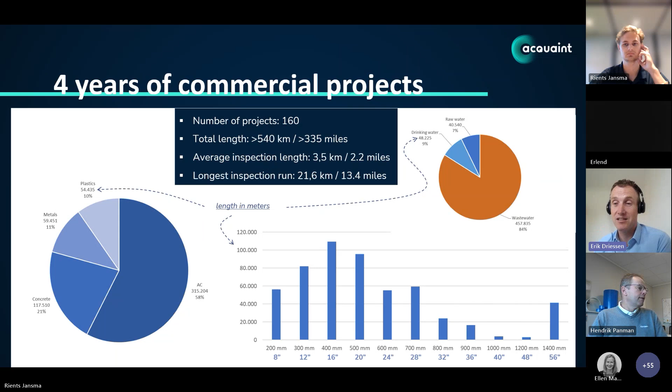And we have a sales team, and a part of the sales team is also Rients. And Rients started with our company a few months ago, really. And he will present the first results with you, and later on I will come back and present an online dashboard with you. This is the last slide for me.

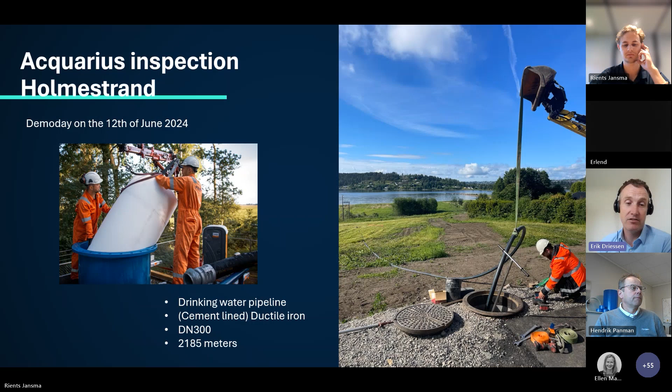So looking back at the project that Hendrik also just introduced to you, it was a ductile iron cement-lined pipeline, or at least, little spoiler, that was what we expected. DN 300 and a little bit more than 2 kilometers, and Rients will go through the results. Over to you, Rients. Yes, thank you.

Can you hear me clearly? Yes. Yep. Okay, very well.

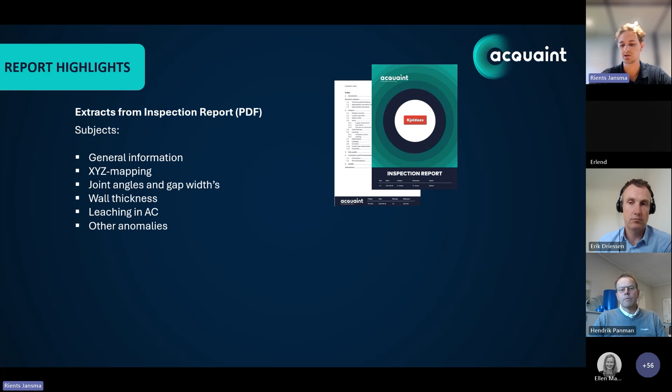So I'm going to tell you something about the highlights of the report we've sent to the Holmestrand Kommune, with subjects on general information, the XYZ mapping, joint angles and gap widths, the wall thickness, the leaching in the asbestos cement, other anomalies, and after that, Erik will show the live demonstration of the online dashboard.

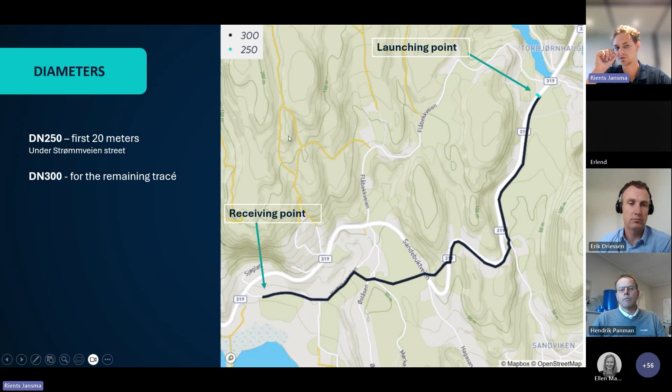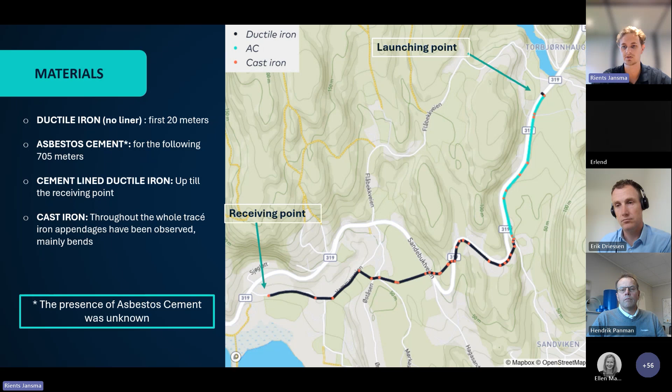So the first 20 meters is ductile iron without a cement liner. Then, as Erik just spoiled a little bit, the following 700 meters is asbestos cement. Furthermore, there was cement-lined ductile iron up to the receiving point, and some cast iron spots, mainly in the bends. So the presence of the asbestos cement was unknown beforehand, which is a big result to get to know that.

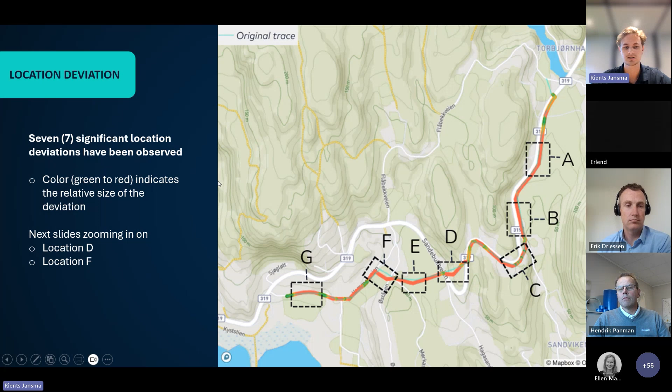Following the XYZ mapping, there were some major location deviations, 7 spots we've highlighted in this map. On the right side, you see the map with the line. The green spots are where the line is exactly the same as where the GIS file said it was. And the red spots are 2 meters away from the GIS file or more. So in the next slides, I'm going to zoom in on point D and point F.

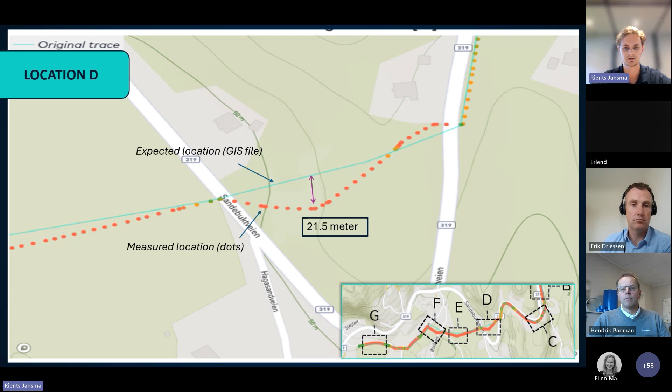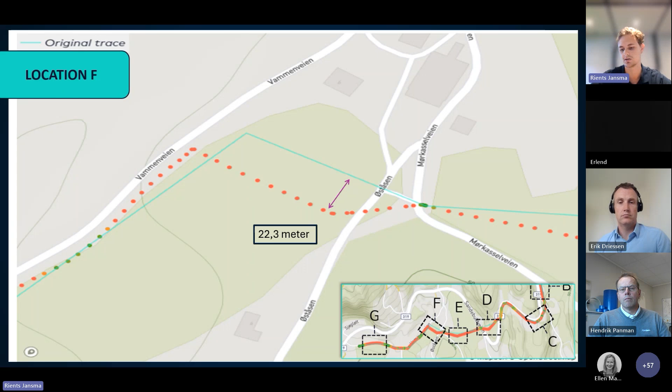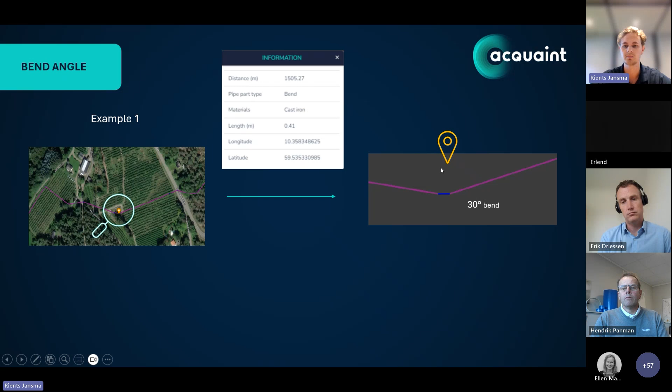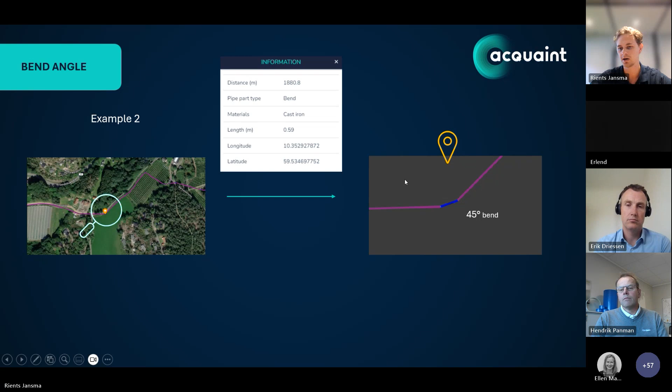Okay, over to some bend angles. We can also see in the data the bend angles of the corners. So here you can see the spot, and over to the right you can see a 30-degree bend. It looks like a line because it's a screenshot from the dashboard we use at Acquaint, but in reality it's just a corner. So here, for example 2, same screenshot on the left side, and on the right side you can see it's a 45-degree bend.

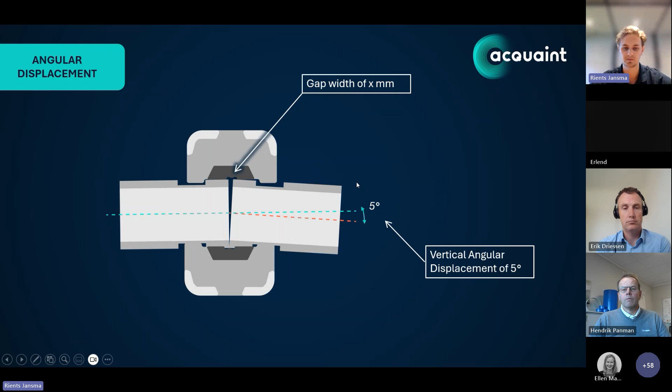Okay, over to the joint angles and gap widths. Like Hendrik also explained a little bit, here's a picture, and here you can see a gap width of X millimeters. On the right side, you can see the vertical angular displacement of 5 degrees. So from the point you have horizontally, and then it goes down a little bit. In total, we've found 4 critical joint angles, 2 vertical ones and 2 horizontal ones. You can see them here. The numbers at the spots are the ID numbers of the pipe sections we've also implemented in the dashboard.

So at the bottom left, you can see a table of the norms. At the left side, the diameters, 250, 300, 300, the materials, ductile iron, asbestos cement, cast iron, and ductile iron. And there's always a norm for this. For ductile iron and cast iron, it's 5 degrees. For asbestos cement, it's 4 degrees. And our measurement accuracy is 0.25. So we build in a threshold, or a grenseverdi in Norwegian, to count these as critical.

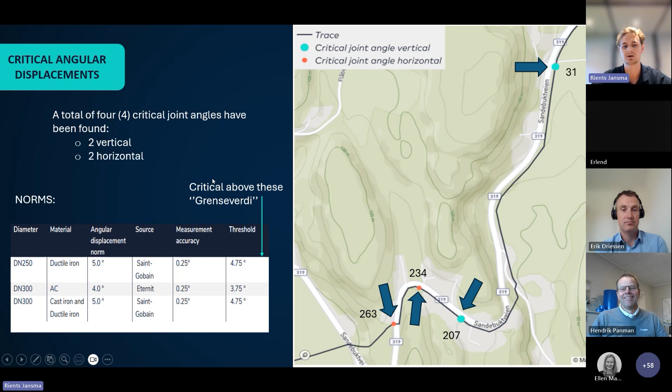So here you can see it's the same map with the numbers, and here you can see the vertical angular displacement. It's critical at 4.46 for AC, 5.71 degrees at ductile iron, 5.07 and 4.86 at the other spots, as you can see here on the right side.

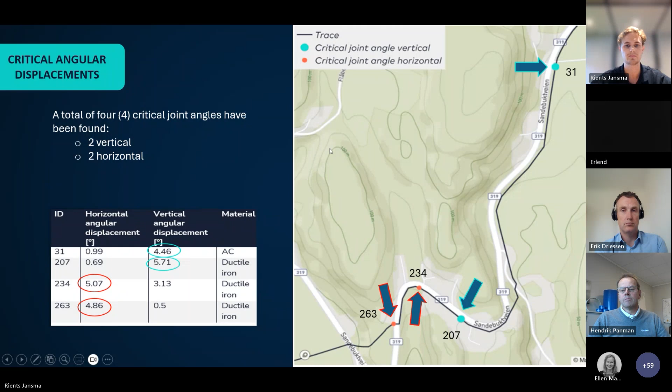Okay, here we see 2 graphs. On the left side, it's the maximum gap width in millimeters, and at the bottom, it's the distance traveled in meters. So the left graph is for the asbestos cement. Here you can see both norms, and none of the points is above the norm, so no critical gap widths have been detected. The same accounts for the ductile iron and the cast iron, so no critical gap widths have been detected there as well.

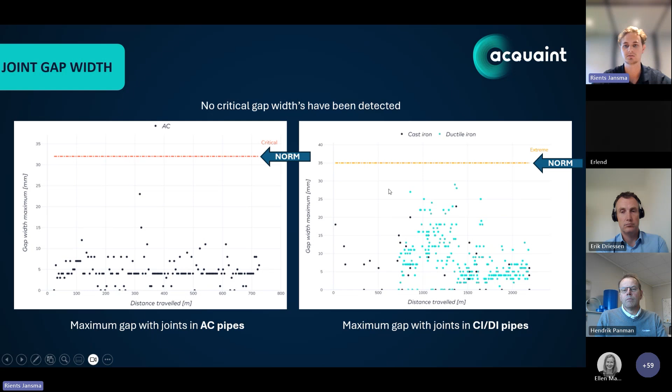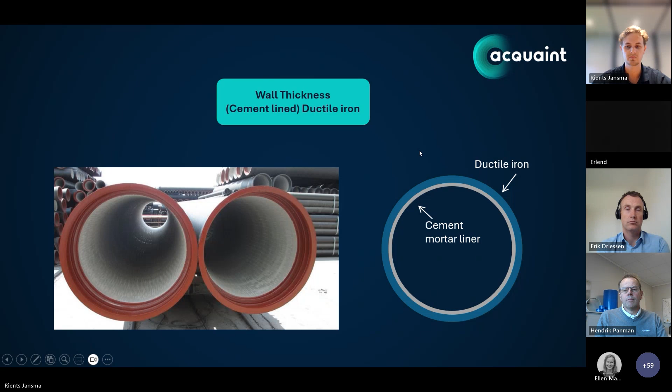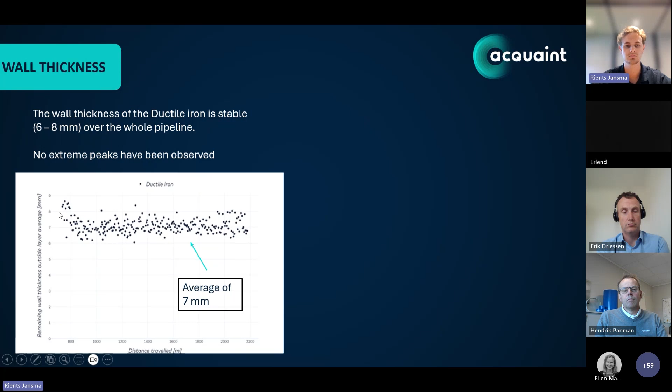The wall thickness. Starting with the wall thickness of the cement-lined ductile iron. On the left, you see a picture of a cement-lined ductile iron pipeline, and on the right, a schematic picture. So the wall thickness of the ductile iron is stable at around 6 to 8 millimeters. On the left side, you can see the graph. You can see the remaining wall thickness, and at the bottom, it's the distance traveled. The average is around 7 millimeters, so it goes from 6 till above 8. Some parts are a little bit above 8 millimeters.

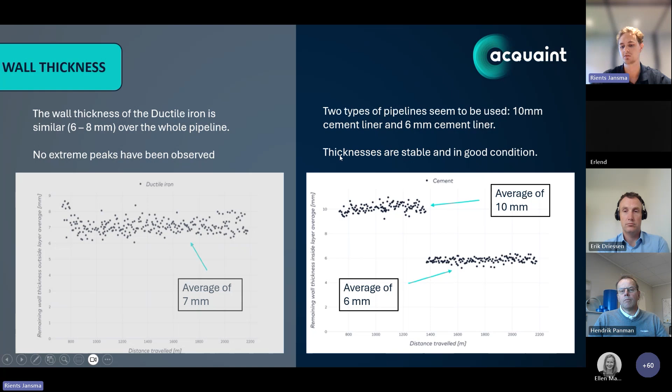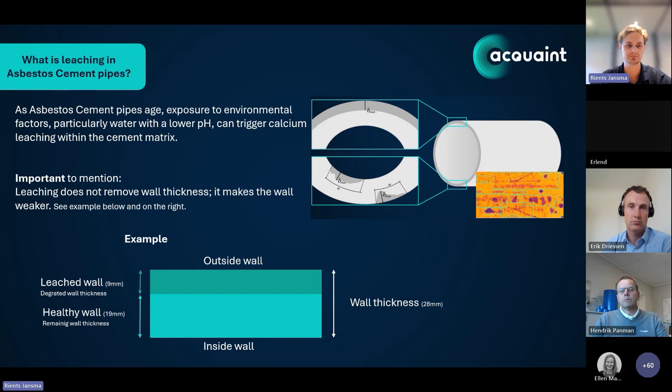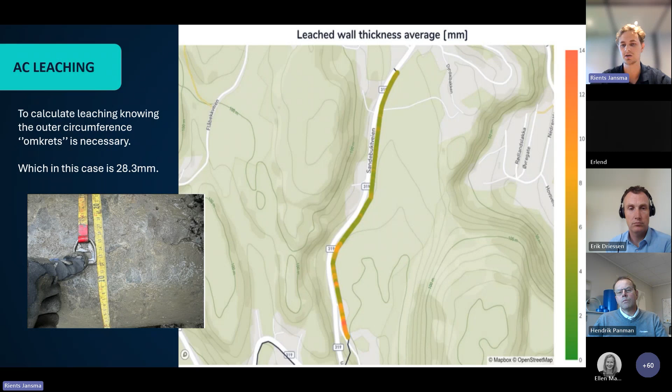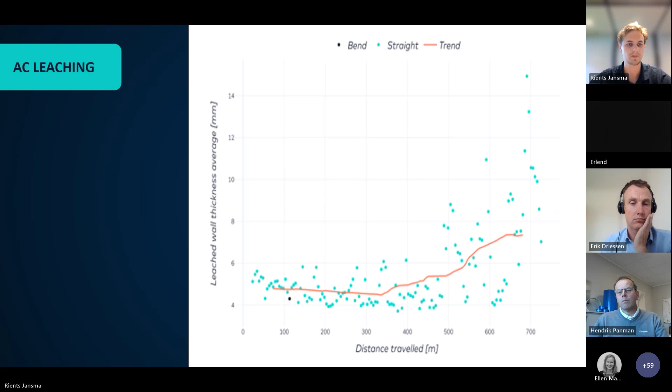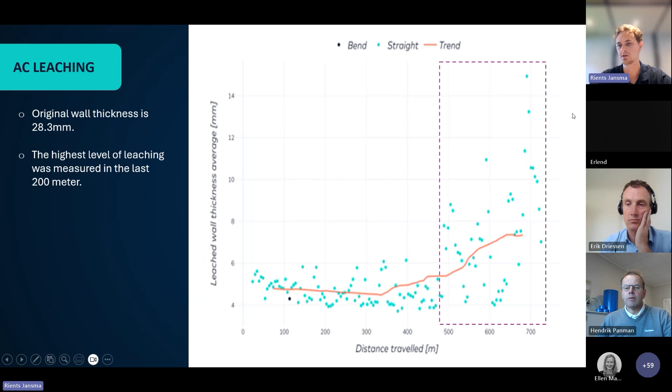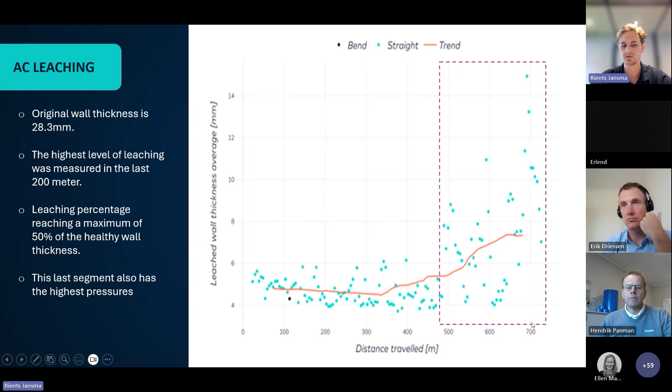So the original wall thickness is 28.3 millimeters, and the highest level of leaching was measured in the last 200 meters of the asbestos cement section. The leaching percentage reached the maximum of 50%. At the top, you can see it's more than 14 millimeters leached, which is 50% of the original wall thickness. What's interesting is that the last 200 meters, the last segment, also has the highest pressures within the tracé.

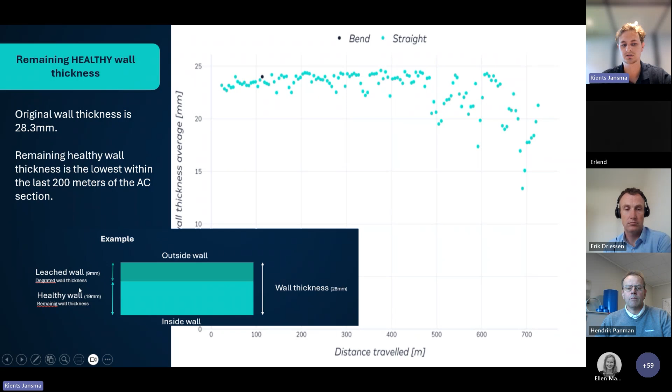So here you could see it as the graph has flipped. So it's the remaining wall thickness, and the distance traveled at the bottom. So at the end, you can see that the last 200 meters, again, the remaining wall thickness is the lowest because of the leaching. It's the remaining healthy wall thickness. Like I've explained before, the wall thickness remains the same. The healthy wall thickness is lesser because of the leached wall you can see above.

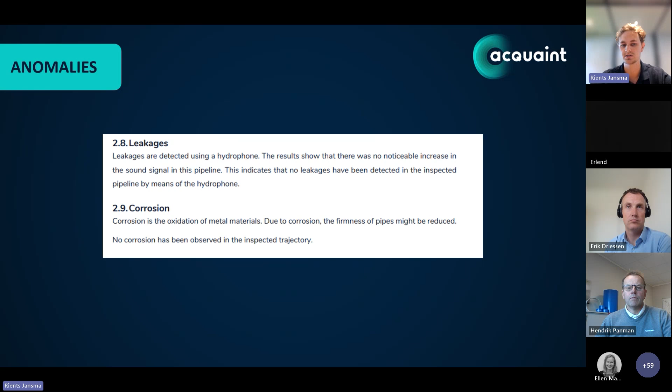So some other anomalies we found, or actually we haven't found, which are leakages. We haven't found any leakages using our hydrophone. And for corrosion, it's the same. We haven't found any corrosion in the whole tracé.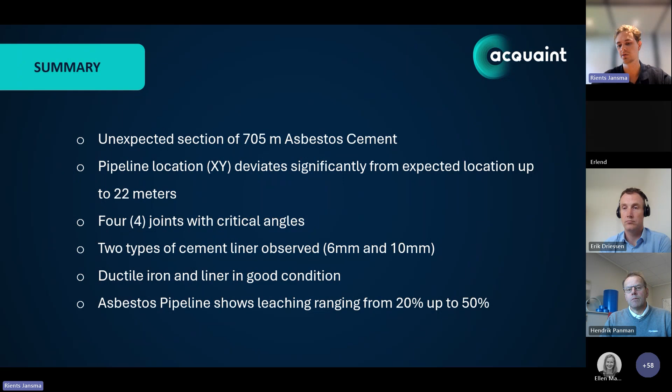So now I'm gonna give it over to Erik, who will show the same results in the dashboard. All right, thanks, Rients. I will share my screen. Do you see my screen at this point? Yeah, I see Hendrik nodding. So that's good. Good. Okay. So thanks, Rients, for presenting the results.

And what we have experienced over the past few years is that graphs and tables are really valuable, but it's always hard to put it into context. When you see the dots going up in a graph, you don't know where it exactly is over the pipeline. So that's why we have developed this online dashboard for our clients to get a better understanding of where we found what anomalies and how you can see that in the context, like in the surroundings.

So at the left of my screen, you see the different filters, if you like, to look at the data. So we're now looking at the general dashboard filter, but later on we will go to the anomalies, the joints, and the pipe segments. So here you see the pipeline that we have inspected in Norway, and this is the height profile of the pipeline. So it goes down, obviously, like often. And at the bottom, you see the different materials. So asbestos cement in this part, and then it goes over in ductile iron.

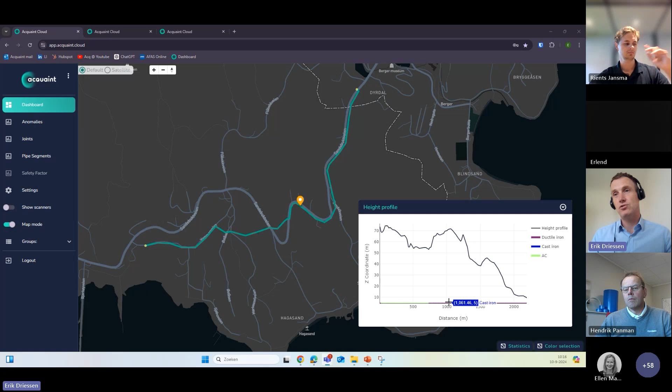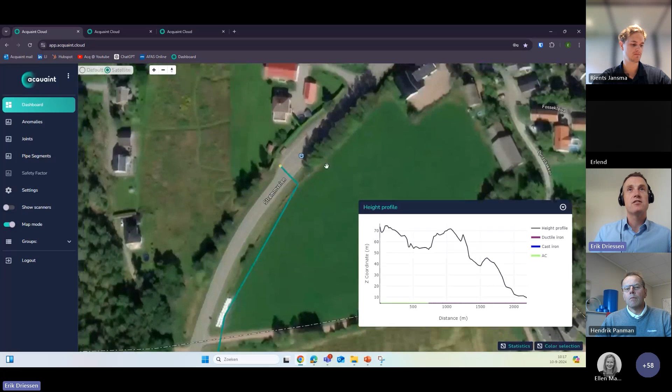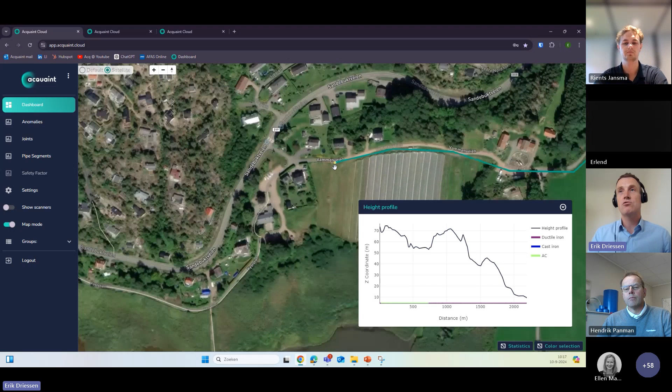Just for the people that are here that also attended the inspection, it's always nice to recognize things a little bit. So this is the point where the bus was parked and where we launched the pig into the pipeline. Then we crossed the street and the pig took off. Then we went down, down, down, and this is the little school where we all gathered, and this is the pit where we took out the pig again. So just for you to have a feeling how the trajectory of the pipeline was.

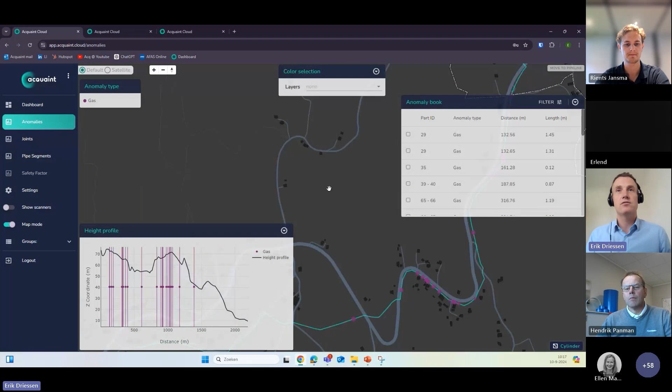So I'm now going to look at the anomalies. I will set the default mode. And in this anomaly view, normally we report the most important anomalies, like pieces of cement that are missing off the liner, if there is dirt observed somewhere in the pipeline. And actually the only anomaly that we have detected here were some gas pockets, which need some explanation, because while pigging the pipeline, there's also a risk of introducing gas into the pipeline, which we suspect has happened here.

So at the bottom, you see the profile of the pipeline again over the 2 and a little bit kilometers. And what you can see is that the instances where we have spotted gas typically are also at the higher points. All the air vents were replaced or checked prior to the project. So what we believe is that during introducing the pig, we took some air with us, and we didn't give the system time to de-aerate those gas bubbles at the air vents.

So this is not really a super valuable piece of information. Still, I wanted to show you this, because in sewer pipelines, for example, accumulation of gas can cause all kinds of problems like H2S attack. But for this project, it was a little bit less relevant. Still, I wanted to show you this for your information.

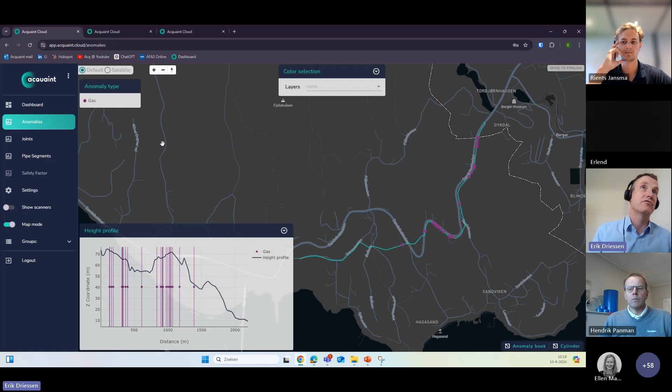So next step is we go to the joints view. So on this map, you recognize the same tracé of the pipeline, it's the same shape. Every dot on the map represents a joint in between 2 pipe segments. The view mode I've selected here is a degradation level, and a degradation level actually takes together the vertical angle, the horizontal angle, and the gap width.

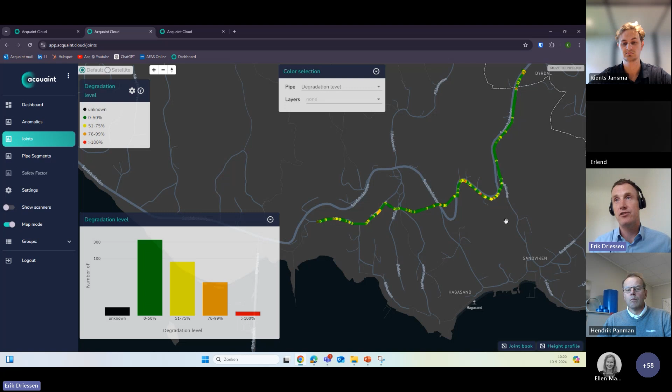So when I click on this joint, for example, you see that there's a vertical angle of 5.7 degrees, a small horizontal angle, but also a gap width. So it's clear that this joint doesn't sit nicely in the joint. So the pipe segments are a little bit shifted away and they're sitting under an angle in this joint.

So what often also helps is when you enable the satellite view here, you see where this joint sits, and sometimes you see a dirt road going over it with heavy traffic, for example, which is not the case in this situation. And when I go a little bit further, you see another red joint here, which has a horizontal angular displacement, but also a vertical and also a gap width, maximum 18 millimeters.

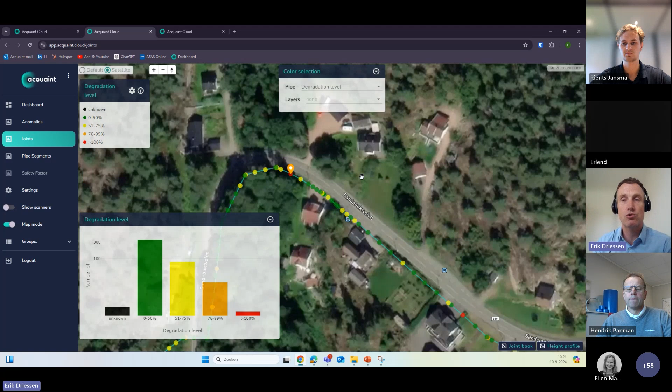So these are also the joints that Rients just showed in the PDF report, because we would like to help the client to look at the most concerning items that we have spotted. So this is a value together, but you can also extract individual measurements. So if you're interested only, for example, in the horizontal angular displacement, the color code changes from -4 to +4 degrees.

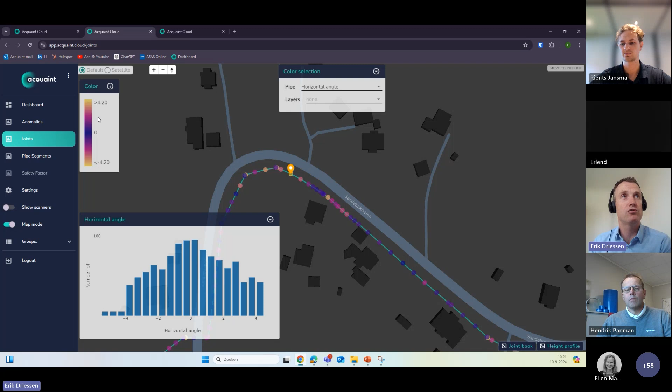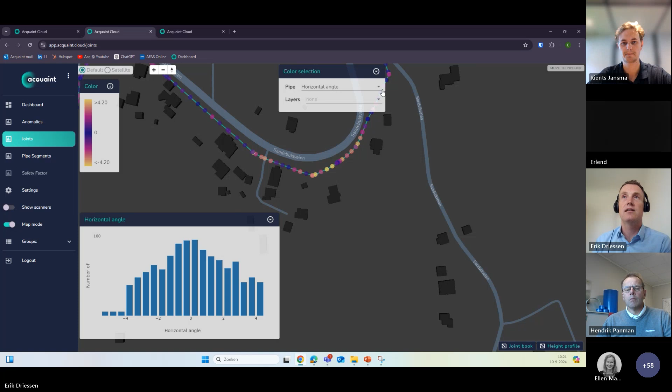And you can see that the spread of the horizontal angular displacement is colored differently here. You see more horizontal angular displacement in this curve, for example. The same you can do with, for example, the maximum gap width. But as you can see, there's a lot of information to take in, so that's why we also came up with the degradation level that takes everything into account and gives it a color code for you to know where to zoom in first. So this is looking at the joints.

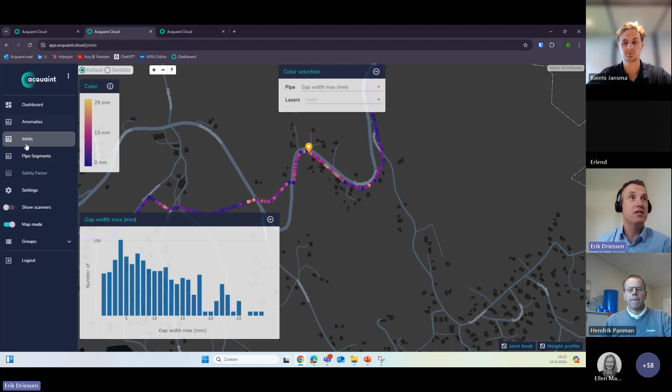So when we go to the next view mode, that's the pipe segments. And basically the pipe segments will tell you what the quality and the dimensions are of the individual pipe segments, and mostly the wall of those pipes. So again, you see the same view over here, and I've selected the view material. So as you can see, there have been 3 materials observed: ductile iron, cast iron, and asbestos cement. This is the spread in terms of number of segments.

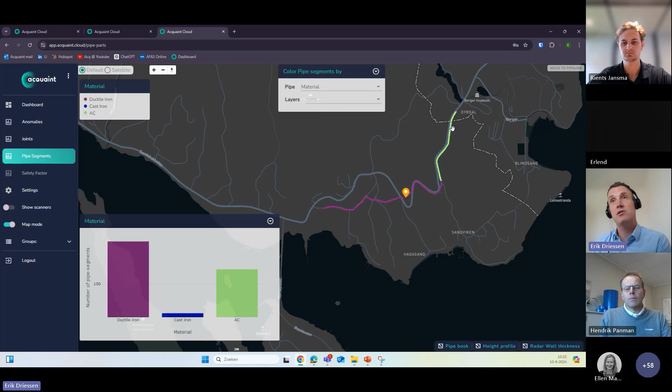And here you can recognize the asbestos cement part at the start, and then it goes over in ductile iron. And like Rients explained, mostly the bent pieces, like here, small blue part there, those are cast iron bent pieces, which are applied almost with every bend. There's one. So that's the material. Also here, by the way, you can select the height profile, and when you zoom out or zoom in, the height profile is adapting to the piece of the pipe that is in view.

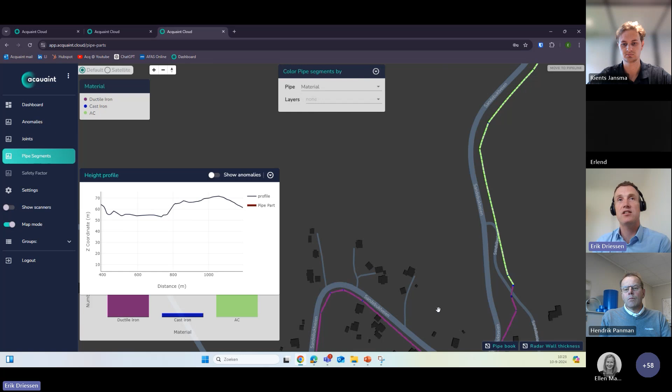Right. So as a next selection mode, I will go to the minimum remaining wall thickness. So let me explain this a little bit. So there is a mean, a minimum, and a maximum wall thickness. We make thousands of measurements per pipe segment. So a pipe segment is a length of 4 or 5 meters, and per pipe segment we make thousands of measurements on the different clock positions.

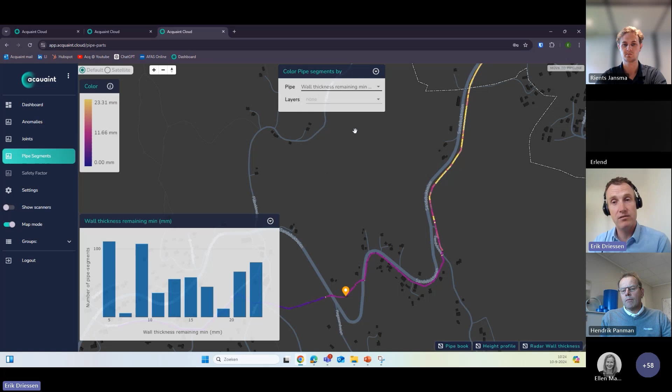To make this a little bit digestible for the user, per pipe segment, we gave it a color code. What is the minimum wall thickness that we spotted? What is the maximum wall thickness? And what is the average wall thickness? So that applies per pipe segment. And of course, as a pipeline owner, you're typically interested in the extreme. So that's why we select the minimum wall thickness. So again, per pipe segment, what is the thinnest part of the pipe that we have observed?

And because we have asbestos cement and ductile iron in the same view, you get quite a big spread, and that is hard to compare. So I open the pipe book here, I select the filter, and I focus on the asbestos cement first. So this is the asbestos cement pipeline. We have selected the minimum wall thickness, and this is a scale from 9 up to 23 millimeters. And maybe you remember from Rients that the original wall thickness was 28 millimeters.

Again, let's look into the, so over here, basically the first time, just after launching the pig, the wall thickness, the minimum wall thickness. Now, let me also show you the mean one. That makes it a little bit less dramatic. So the mean wall thickness ranges from 13 to 25. But when I look to the minimum, that ranges from 9 to 23. So this is also the conclusion. The thinnest little spot of remaining healthy wall thickness of the AC is just 9 millimeters.

So let's zoom into the last part of the pipeline with the least part of healthy wall thickness. And when we take, for example, one of the more blue ones, you can click on that pipe segment and then open the radar with the wall thickness. So here you see at the different clock positions in the pipeline, the wall thickness. So this is the y-axis, and the x-axis is basically the circumference of the pipeline.

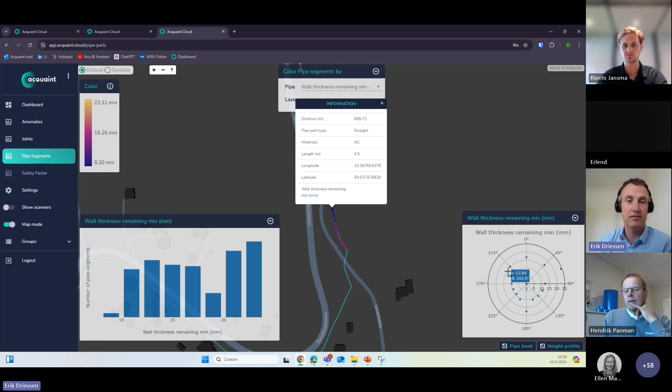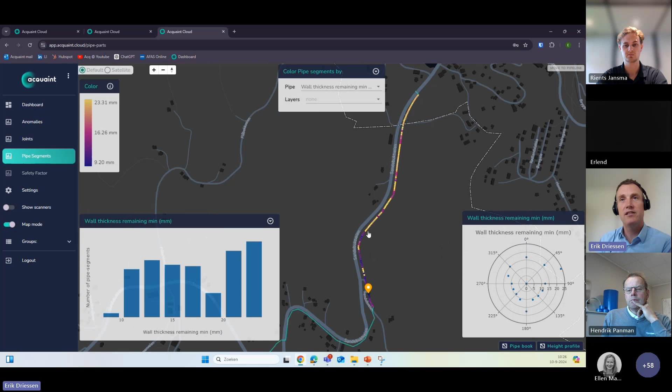So here you can see that at the 9 o'clock position, for example, there's still 11 millimeters left of healthy wall thickness. When I select this pipe segment, for example, you get another view. So this pipeline, the minimum wall thickness on basically all the clock positions is heavily degraded. And you can do that for all the pipe segments that you're seeing here, but also this view tells you up till here, the minimum wall thickness is fairly stable, but here suddenly there's something changing.

So sometimes it can help when you enable the satellite view to see, hey, what might be a cause coming from the ground level. And what we see in the Netherlands often, for example, agricultural activities like fertilizers or those type of activities could cause damage to the AC pipeline. And we also saw that the leaching of the pipeline is coming from the outside. Another cause could be soil type, like clay versus sand versus rocky soils, or groundwater tables.

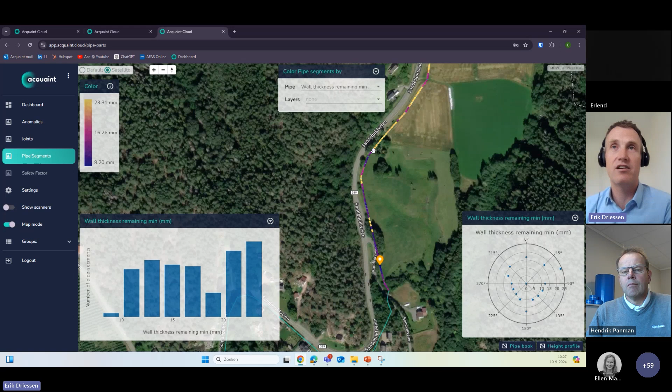Another explanation could be that this is installed in a different time. This is an older piece of AC pipeline, and that's just a newer part. And sometimes you can answer those questions together with the client, and sometimes it's just guessing. So that was the asbestos cement section.

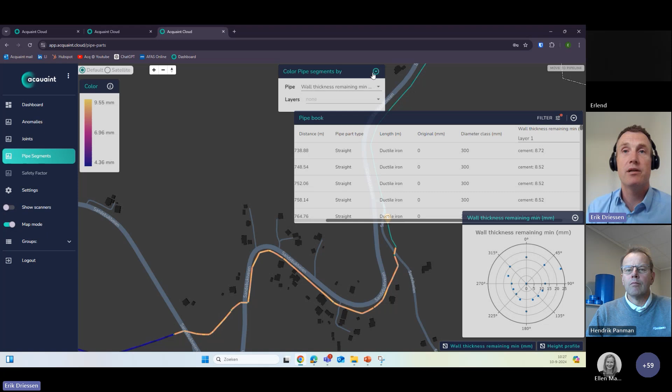Let me open the pipe book again and go to the ductile iron. And let me minimize this one. So we're still looking at the minimum wall thickness. So this is the ductile iron pipeline. And you see clearly two colors because in the pipe book, I selected the first layer. And the first layer is cement. The second layer is the ductile iron. And the third layer is a combination of both.

So let me start with the first layer, that is a cement liner. And like Rients explained just now in the graph, we saw a big jump in wall thickness of the cement liner, which is clearly visible in this picture. You see here, the yellowish color is around the 10 millimeters minimum wall thickness of the cement liner. And then it jumps down to around 5 millimeters. But also when I select, for example, the mean, it's all very stable. It's a very stable wall thickness of the cement liner. And you can also select the standard deviation, and that's also relatively stable.

So again, like Rients presented, the cement liner, it's an interesting observation that there seems to be a different type of pipeline, one with a thicker cement liner and one with the thinner, but the cement liner itself was in a perfect condition. So let me open the pipe book again and go to the second layer, which is the ductile iron itself, basically the most important part of the pipeline, of course. And what you see here from the start till the end, the wall thickness ranges from 5 up to 7.3, which is the color code. And this is again the minimum wall thickness.